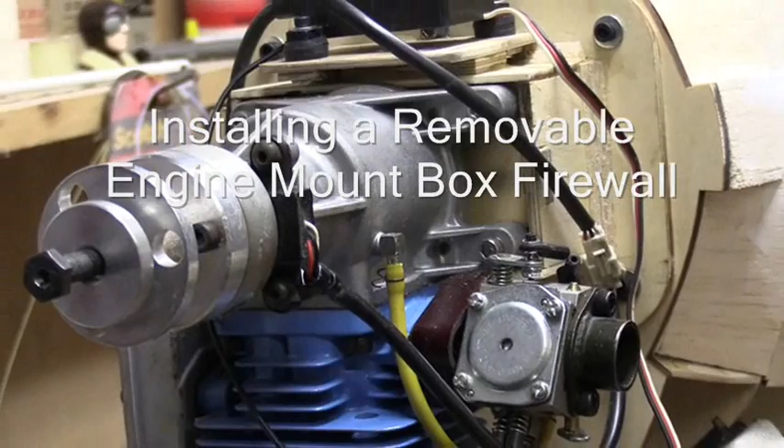I'm going to show you a little sneak peek of an upcoming how-to article for Model Airplane News, and it entails work that I'm doing on my modified Nick Ziroli Skyraider. It's a reduced version from his 100-inch plan, and this one is 85 inches, so it's being reduced 15%.

And the how-to itself is how I installed the engine, which here, as you can see, is a Fuji 43cc gas engine. Well, normally, with a giant scale warbird like the Skyraider, the airplane engine would be attached to a very strong attachment box, which is then glued and reinforced to the firewall.

For this how-to, I've actually made the whole attachment system a bolt-on, so it's actually removable, so you can work on the engine and also all of its internals, which would include the battery packs, the throttle servos, and the fuel system. So to get into all of the details of how this whole unit is put together, I'll go step by step and show you all of the parts required to put this system together.

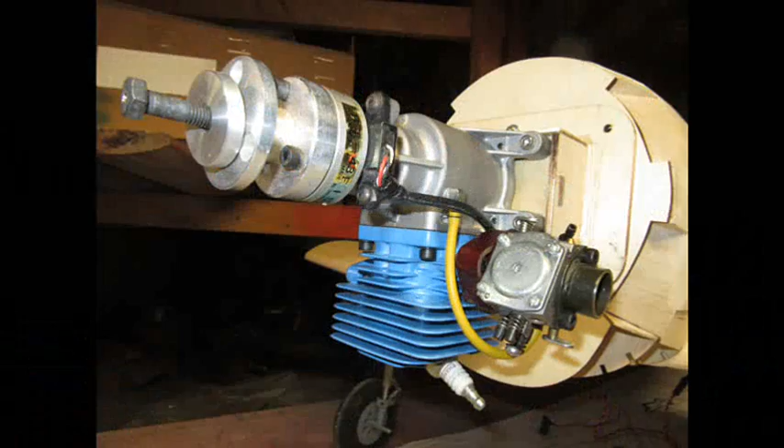So the first thing, obviously, that you're going to do when you're making a removable engine mount is that you have to have the engine itself, and you also have to have the side view of the fuselage so you can put it in place and see how it's going to fit.

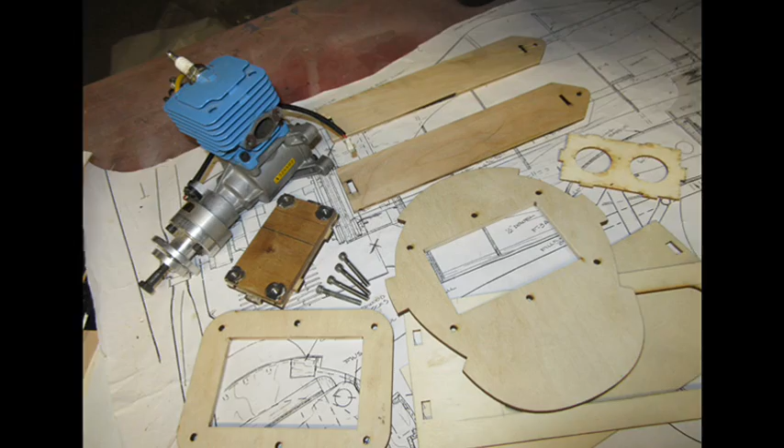Also, you need to make the parts, of course, for the attachment box structure, and with that you'll need a new firewall, the firewall attachment ring, the four sides of the box structure itself, along with a sub-firewall that is matched to the attachment bolts for your engine, and an aft bulkhead which ties the whole thing together, the aft part of your structure.

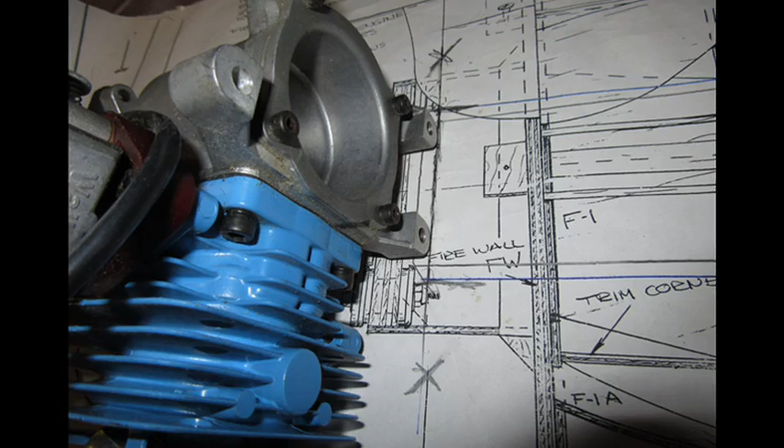And then what you do is you take your engine and you lay it on the plans, and then you look at the front to make sure that you have plenty of propeller clearance in front of the cowling. Then go back to where the attachment bolts will be on the lugs on the back side of the engine, and draw a line here on the plans that show the firewall structure.

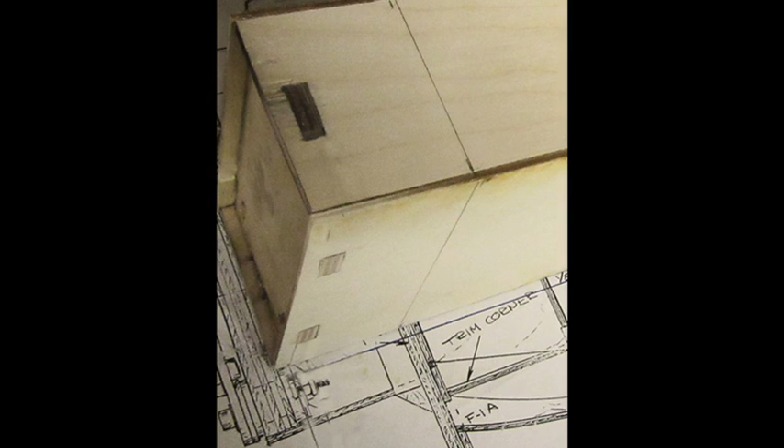Once you have your box all together, you place it over your plans again, and you align the face of the sub-firewall to that line that you drew on the plans. And then what you want to do is you want to transfer the face of the actual firewall for the fuselage. And I take a mark, and then I use a straight edge or a square, and then I do all four sides, making sure that everything lines up properly.

So here I've slid the attachment ring so it lines up with the pencil marks that I made that represent the face of the actual firewall for the fuselage. It's important to make sure that you have this on the right side of the line, and you want the back of the attachment ring to be lined up with the pencil marks.

For a little bit of reinforcement, you can see that I've also installed balsa wood tri-stock, and this is 1/2-inch tri-stock, and it's glued in place with thick epoxy, 15-minute epoxy, and allowed to cure, and it's on all four sides, and this really strengthens the overall attachment of all of these parts together by increasing the area of the glue sections.

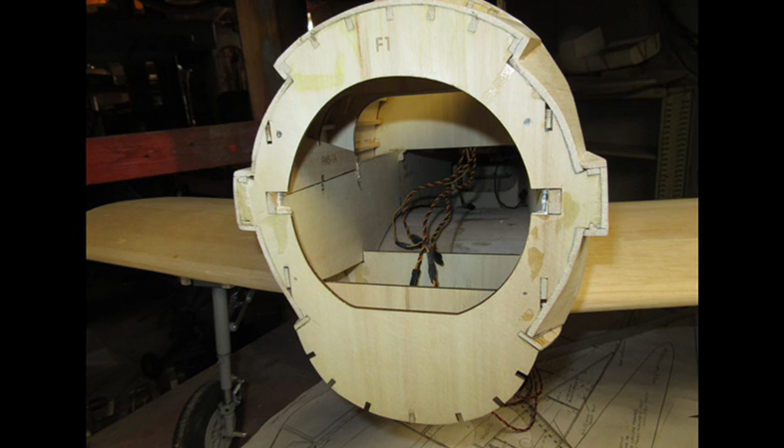Here you see the front of the fuselage, and this is F1, the firewall, and it is ready for the firewall to be installed. And of course, this is the new firewall that I had spoken about, which has the 6 holes for the attachment bolts, along with the large opening for the box structure to fit into.

And again, this is attached with 15-minute, or if you want to, even 30-minute epoxy. And you really don't want to skimp. You want to really get a good bond here, because this is the main structure that's holding your engine to your airplane. As you can see here, the box structure fits right into place, and you can slide it right in, and the attachment ring will fit right up against the main fuselage firewall.

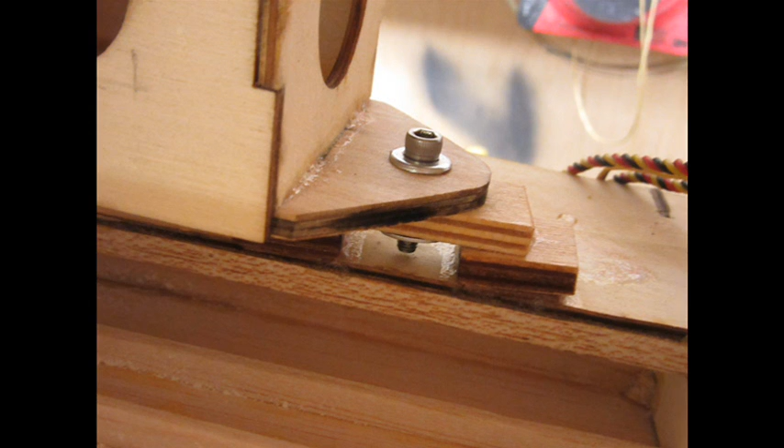Inside, as you can see here, the back of the box structure actually has a couple of extensions built into it, and this is where we have made a couple more attachment points. So besides the 6 bolts in the front, there's 2 additional bolts that secure the box structure to the fuselage airframe inside, and that's done with 8-32 blind nuts and a few layers of 1/4-inch plywood, which makes up very nice, very strong, easy to install and remove attachment bolts.

To get the attachment bolts in place up front, what's really easy, instead of trying to put the blind nuts into the actual firewall, what I like to do is I cut a series of smaller squares of 1/8-inch plywood and then install the blind nuts on those.

Then what I can do is I can reach from underneath. Again, like I said, we didn't put any sheeting on the fuselage underneath the chin area, and I can reach in and then one by one attach these blind nuts along with the threaded part, the screw, and tighten the screw to pull the blind nuts into place.